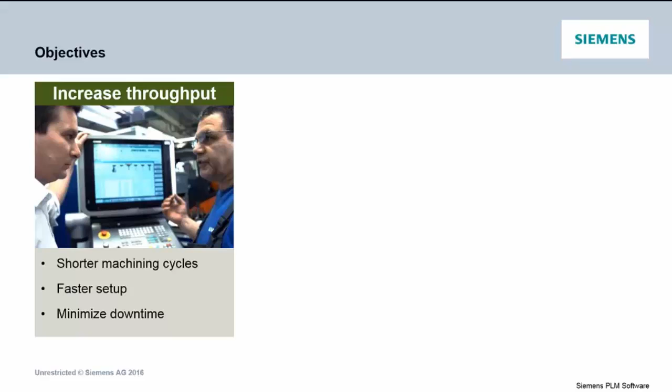Objectives, therefore, everybody, whatever industry you're in, you're going to be looking at increasing throughput. Everybody has to do this. That's one of the key competitive pressures on us. So increasing throughput can have different effects on us. Of course, from a digital point of view, in machine shops, we want to go faster, shorter machining cycles, faster setup, and so on. In quality, we want to meet quality standards. And that can mean precise machining, better finish, using best practices, so we have repeatability. That's an element of quality. So quality has many factors or many facets to it in the way you assess it or what you think about in terms of quality.

And expanding your business. As we compete, we want to look at new areas, new technologies, things that are coming into the business that we can take advantage of. And we'll look at a few of those. I mean, 3D printing, what does that fit? We're working hard in that area, and we'll show you just a little bit at the end of the presentation around 3D printing and talk about the impact there for us in our part manufacturing business. A very interesting area indeed.

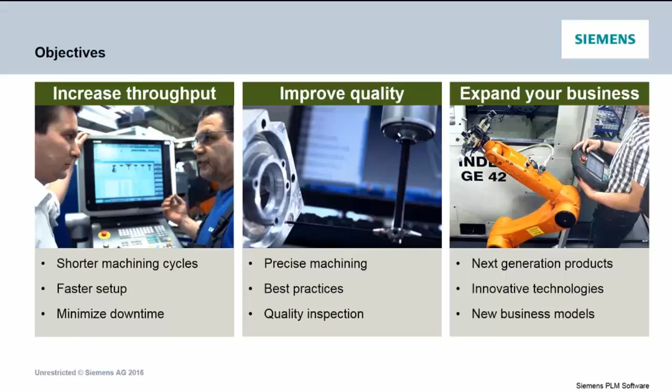So today's topic is the digital machine shop, and one of the things we're really focusing on as we talk about this topic in general is the concept of a digital thread. And how the advantages of doing that, why we want a digital thread, how we want the digital thread to work, what we mean by it, and how we operate it.

So a digital thread really, and supporting it, means being able to work with the same information right through the entire process. And we'll see this repeated through our presentation today, the concept of one definition, a consistent definition, whether we're defining a process digitally or whether we're defining the product or materials or tooling or equipment like machine tools. We want that to be consistent, and we want the information to flow consistently right through the process from manufacturing engineering. Let's say we're bringing the design data in.

You might be bringing design data in from a customer, if we're a machine shop under contract, or for a vertically integrated company that does design and manufacturing, we'll be bringing that design data in from the design office. But either way, we want that thread then to continue right through the manufacturing engineering process as we do our programming, as we do our validation, and then right through to the shop floor into production, right to the point of use on the sharp end with machine tools and fixturing devices and measuring devices and so on, and tool presetters and things like that. So consistent digital thread is what we're talking about here, and it's one of our objectives in terms of what we're trying to achieve.

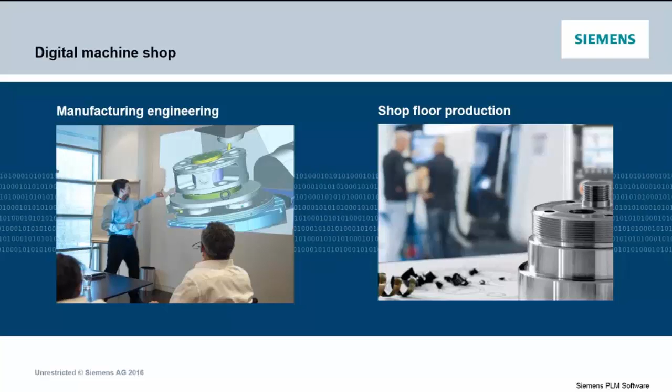So we also use this term digital twin, and that's a very important theme for us as we talk about the digital machine shop, a digital twin.

Most of you will be using a digital twin to some level, because if you're using CAM software today, most CAM software will give you the ability to create a model of the part, the component being machined, the stock. It'll also give you the ability to model some element of the machine tool in 3D solids, with all the fixturing in an assembly. You can press a button, do some simulation, but in a sense you're representing in 3D solids the physical component or physical system on the shop floor. That, at a single point, is an example of a digital twin. I have a twin of the real thing in my virtual environment.

But what we're going to talk about is not just doing that at single points like in CAM, but doing that consistently, having a system and ability to do that across all the different processes and steps through your entire process. That's the essence of what we're going to talk about today.

So we'll show you an example here, step through this as it builds. We'll show the example with a couple of different processes, and you'll gradually get the picture of why we want to extend that concept of a digital twin across your entire business.

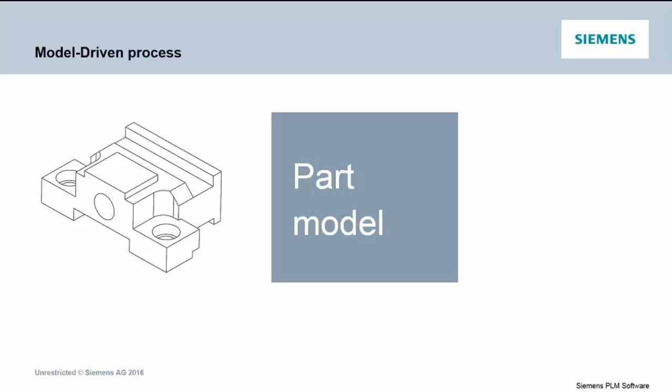Model-driven process is a key piece here because everything should be modeled, everything we're working with is often in 3D. Some of the data is just data, associated to the models like PMI data, and we have to manage that too. But the model part is critical. Everything should be 3D, should be solid as much as we possibly can. Sometimes we have to mix surface information with solid information, and we're getting smarter at doing that. But generally, we're talking about solid 3D models that come into the system.

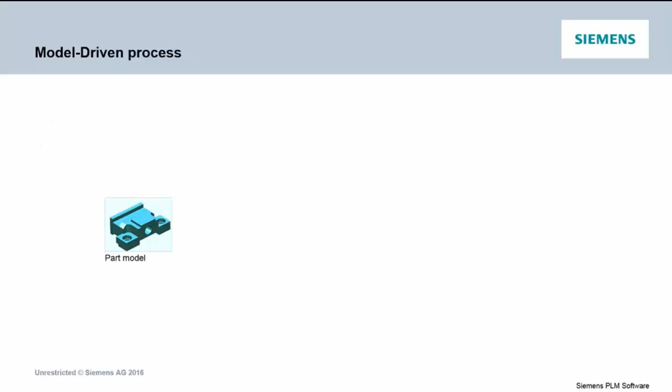We're going to show two threads here. One where we take the data in, the part model, a simple prismatic component here. We take it into part and fixture preparation. We want to work in the same 3D environment where we model everything, including the fixture and work holding, ideally using the same system, so we have one consistent environment as the part itself is modeled.

Take that into programming - in this case this thread with CAM that I talked about, where we're doing programming. We'll see that later, we'll do some simulation. Ideally we want to stay in the same environment. This is important to continuing and maintaining the consistency and resilience of our digital thread - we try to stay in the same environment with the same model definition. We'll talk more about that as we go through more slides.

Then producing shop documents, we produce it off the model. If I want a representation of the part at different stages, stage models and so on, I want to pull that off the same definition of the model with the setup data, so that it's consistent. If I have to go back and change a fixture or setup, I want to quickly replicate that in the shop documentation update. Using a consistent digital thread with the same technology, that becomes relatively easy, as opposed to using a separate system for shop documentation in Word or whatever you might do today. If I have it in the same system, I have a consistent digital thread, and that's important as I go down to the shop floor.

In the parallel thread here, I want to use the same modeling system, taking PMI data on the model. Hopefully when the data system comes in, increasingly people are using product manufacturing information attached to the model - the tolerance information, surface finish information, and so on, encapsulated in PMI data. Traditionally it would have been on drawings, and you'd have to pull it off manually. But today we can add that to the model. It's quite common, and the system today can read that in and use it to do programming.

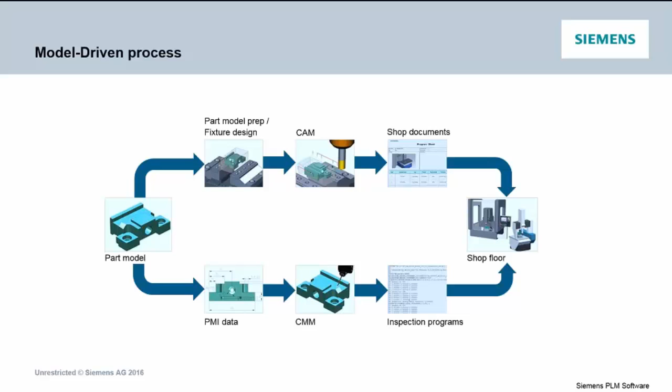What we're portraying here is using a consistent digital thread through the process, and ideally the same system across the entire environment - one system, one model, going from part preparation right through programming of different types and then down to production. This is really one of the key tenets of a successful digital environment inside a machine shop.

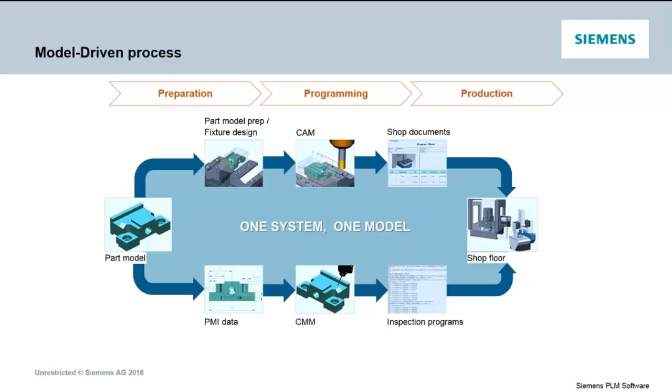We've got a video we're going to run here, so I'll try and talk to this. This takes through a number of steps here from part model preparation. We're bringing data in because I'm a machine shop - I bring data from my customer. We have to be able to read in all sorts of data files and different systems, of course.

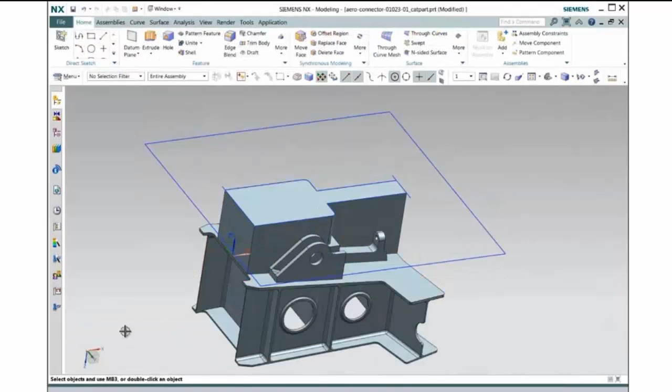Hopefully it's intelligent data, a solid model - here we're spinning it around. We're going to use our CAD functions, and it's fully integrated, so we have CAD functions available. These days some of these are quite sophisticated, giving us the ability to automatically adjust, do assemblies, for example, and maybe work on the part - fill in holes because we want to go over them for machining, changing fillet angles, or making other adjustments to the part, adding stock onto the part, using tools that are readily available inside the same modeling environment.

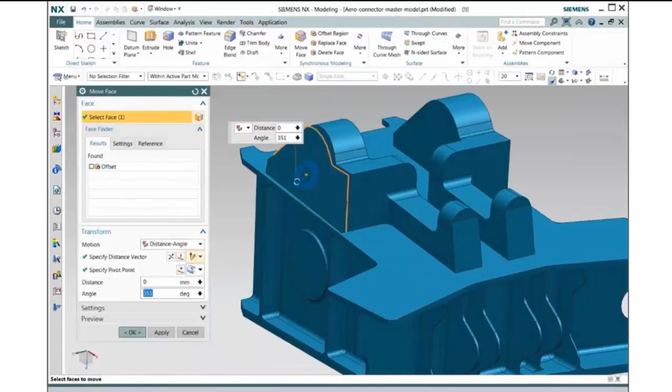So this makes it much easier rather than going from system to system. Here we see the part in a setup.

We're going to do some CMM programming that I talked about, taking the part ready for inspection. In this case, we produced the CMM inspection program from the PMI data - you see the different inspection paths here. This was produced very automatically from the PMI data that came in attached to this part. It's got an inspection program that's simulating it here inside the same system.

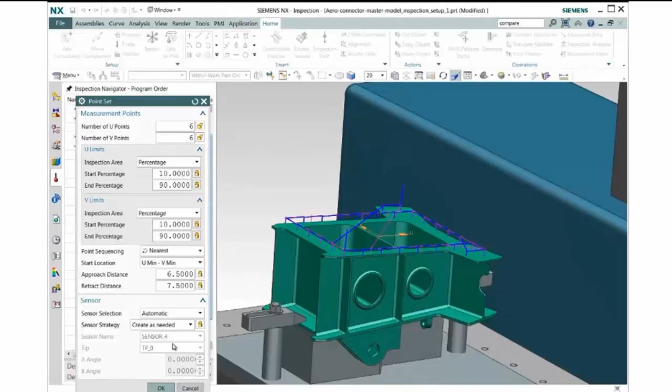We want to make a manual adjustment because we want to have fewer inspection points than the PMI data created. So we're going to go down to, I think, 6 inspection points on those sides.

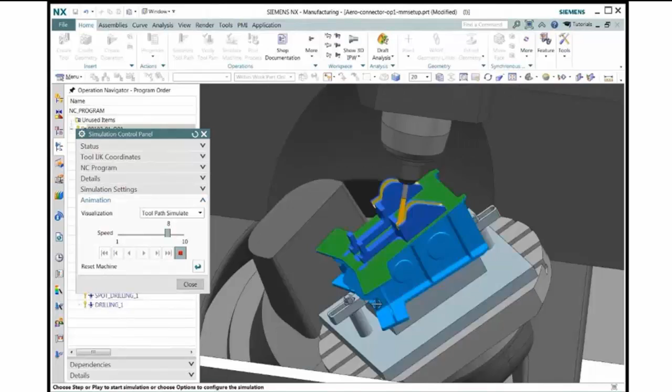Then we're going to switch across now quickly to some machining simulation, and we've done some programming in CAM. We're in the programming environment, all in the same system, same model, working in this case with a 5-axis machine. It's an assembly in the same digital environment, solid model - it's all solid, so I can check for collisions if I want to in simulation. Run by G-code - we'll see that again in a minute.

I'll talk more about G-code-driven simulation. A variety of machining processes here. We're just seeing this being simulated, checking the process, doing validation, all in the same environment before I send the data to the shop floor.

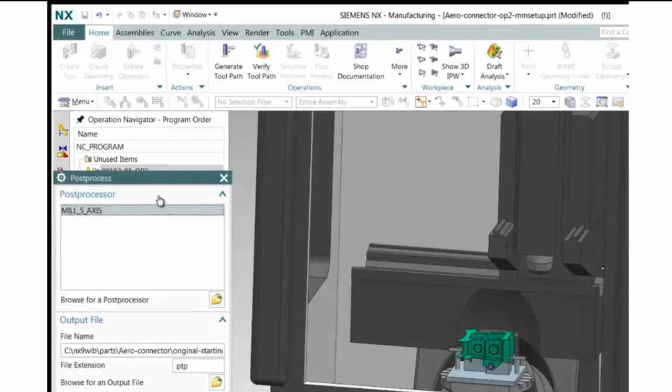Post-processing, simple 5-axis processor here, and then putting the data down to the shop floor, as I said, capturing its information from the same digital environment.

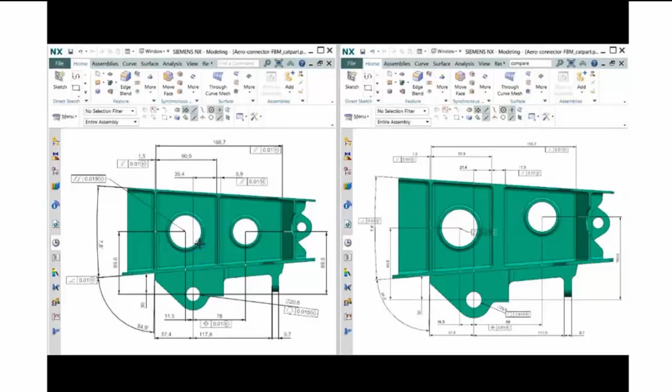Then if I do a design change, there's always updates, possibly. In this case, it's through simple changes here to this rib in the middle that's going to change, and the other is the position of this hole on the right-hand side. Change those - typical thing that happens, again, because I'm in the one consistent environment.

I have to go back and just update my machining operations, and that's virtually a click. I haven't changed the machining processes, just changed the positions, so I can reprocess those quickly and accept the updates.

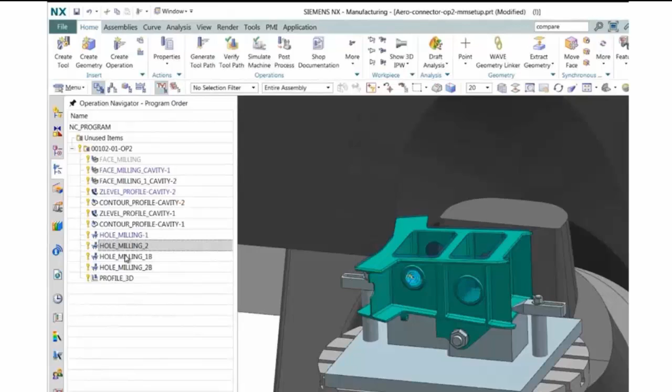Again, much easier because it's all in one system. We'll see the change next when we go back to the PMI data. I want to quickly do an update on the inspection paths to make sure they're okay given these changes. You can see we ran that very fast, working in a similar environment, everything in solids, even the inspection model and inspection probe, all in 3D solids in one single consistent environment.

So an example here, this company is not a big company, but a successful user of our systems. NX is the system that provides all this technology from Siemens, making rock crushing equipment. They use 5-axis machines and a few of those run NX, so there are valid savings in throughput and performance using this advanced technology.

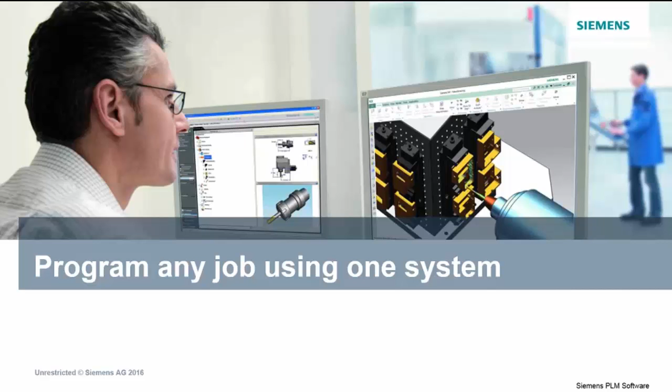If you're going to have one system, it needs to have all the functions you need, because otherwise you have to go elsewhere to buy the pieces. What we'd like to do is program any job using one system. When it comes to CAM, you need the system to give you the range of functionality you need. Otherwise people switch between systems because wire EDM is better over here, or they have different applications for turning, for example. But that makes it much harder to have a consistent digital thread through your machine shop if you have different applications.

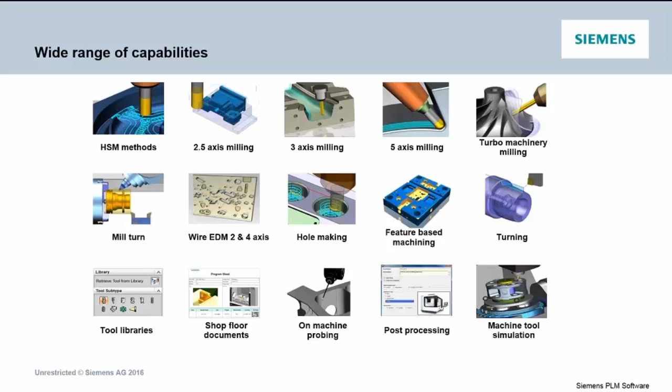So ideally you need a system that has as complete a range of capability as possible. Sometimes it means taking a choice: to get the value of a consistent digital thread, I may use an application inside my main system rather than a standalone one that offers some extra or different function. That's always a trade-off, but our view is that where possible you should be consistent and use one digital thread. That's what most of our customers find when they use a system like NX, which covers a wide range of functions, in this case in CAM.

Within those applications you need good capability, so you're not always turning to separate point applications for extra functionality. Things like volume-based milling, which we'll show video of in a minute, use more intelligence around the model. Because we're working in 3D, let's use intelligence when programming, especially for prismatic parts, which are actually quite hard to program if you have to pick a lot of boundaries. You want an intelligent system that understands the volumes, since it's 3D solid modeling, it should do that for you rather than picking lots of 2D boundaries or planes for containment. We'll show a little video of that in a minute.

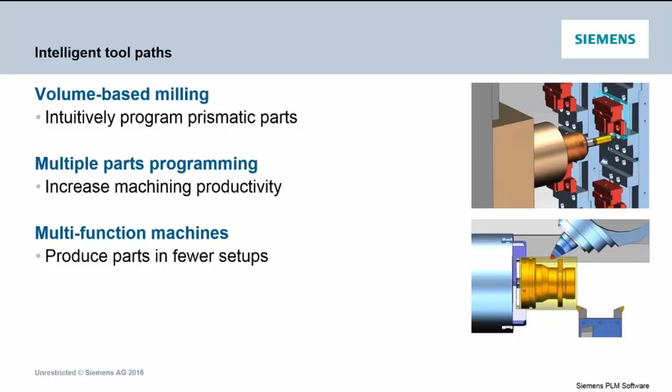Programming multiple parts: you've got lots of parts to program, especially in machinery, or the same is true in mold and die, lots of parts to program and machine, maybe across multiple setups and multiple components. We'll show some automation of that in a few minutes. Multifunction machines are another area. If I'm making prismatic or machinery parts that need turning, often it's turning and milling combined, so I want to program mill-turn combination machines, and we'll show you a video.

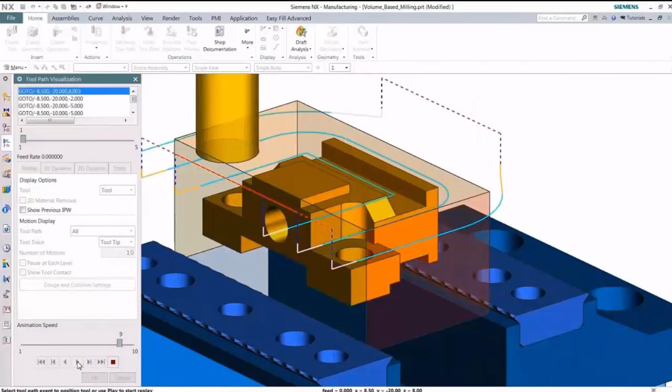So this is the video running, programming volume-based milling. This is a really interesting example where we understand the volume in 3D, so we don't have to pick lots of individual boundaries, a big contrast with some of the older systems. We can determine these volumes automatically, and the system can automatically sequence them, and if you make changes the sequence updates. There's a great deal of intelligence in the way the system works in 3D volumes. We can program across multiple setups, and the system intelligently handles the in-process workpiece from stage to stage, step to step.

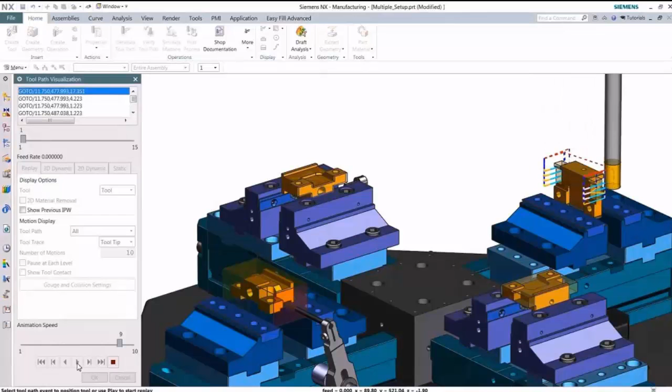And again, if you make changes, it'll ripple through. But we carry the information about the in-process model from each of these setups, and we optimize the movement from machine to setup to setup or position to position, minimizing air time or air cuts.

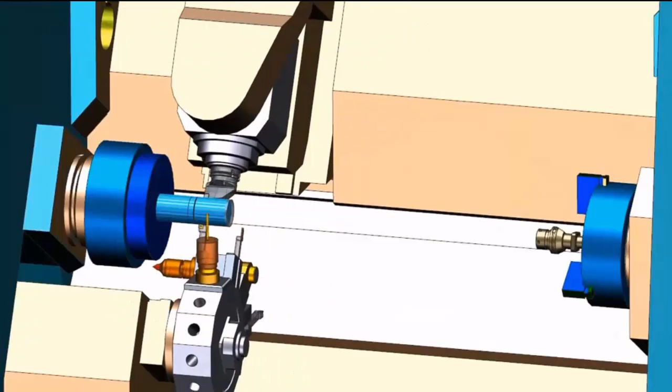Here we're switching to a different machine. This is the mill-turn combination machine, a B-axis head, a turret at the bottom, and then the ability to do part changing left to right. I think in a second we'll bring in the lower turret here and do some synchronized machining on that component on the left, and then we'll cut it and take it off.

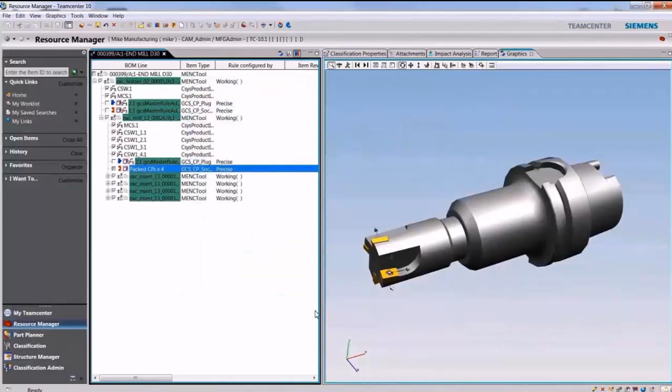Switching quickly here, another aspect, managing data. If you're in machining especially, lots of different tools, you may want a tool library. We have the ability to, working in full solids, create a solid model assembly of the tool assembly, working from our tooling database here that actually comes from our closely connected Teamcenter technology, which we'll refer to a bit later.

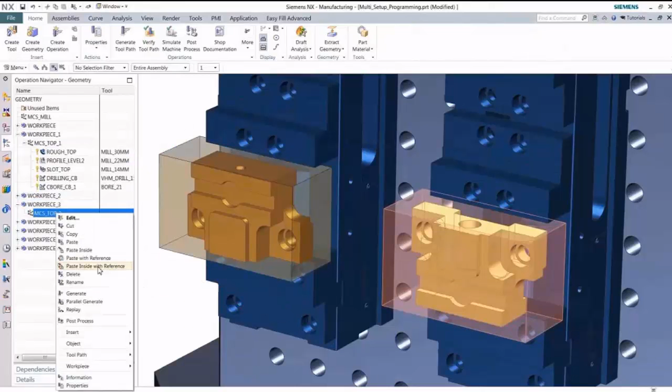If we want to move one of the parts for some reason physically, we can update the tool path relative to the XYZ positions. If you make a change on one of the parts, we can decide whether to replicate that through all the other parts or just have the change on one part.

So lots of intelligence here, which is available to us because we're working in one modeling environment, and the system is intelligent across all these different positions. Everything here, the machine, the tools, the fixture, and the tombstone are all done in 3D solids in one full assembly system that you have access to in this environment.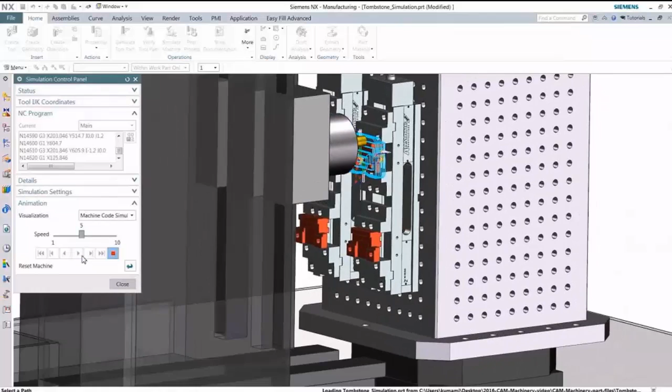Simulating G-code here, you can see the G-code running to the left on that little panel, working off machine code simulation, which we'll talk a little bit more about in just the next couple of slides. Just finishing off here a little bit more machining.

Moving now in the same video, talking about using the same system, again back to the CAD functions, the power of the assembly that you need in this environment, the assembly tools producing fixtures. These fixtures will come perhaps from a library. Obviously they're pre-designed, you may be using standard parts, you reuse them and bring them into an assembly environment to produce the work-holding arrangement for this component.

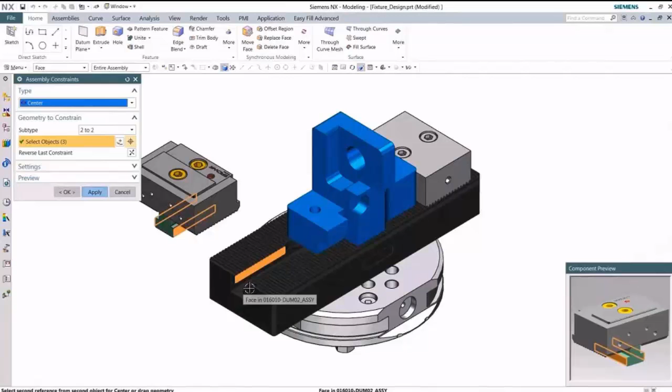Using all the same modeling environment, full solids, one system, consistent digital thread, the ability to produce that out then for drawings, setup sheets and so on from that model environment, ready to go down to the shop floor as a setup drawing.

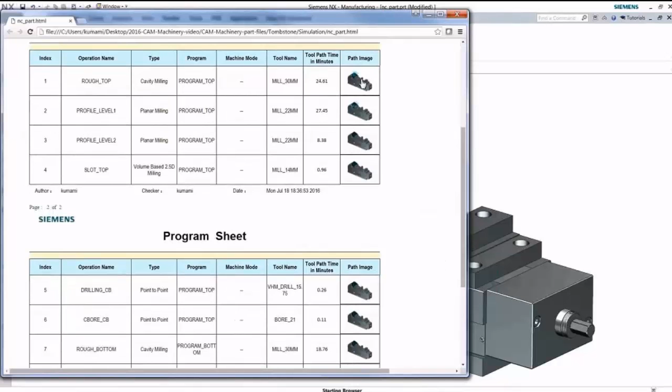Different outputs here, different formats, easy to change the formats, easy to review it, see it on a web browser, see it on the shop floor. We'll show you how we control this data and manage this data later in the last section of the presentation. And a nice little video here of the part being actually machined on the shop floor.

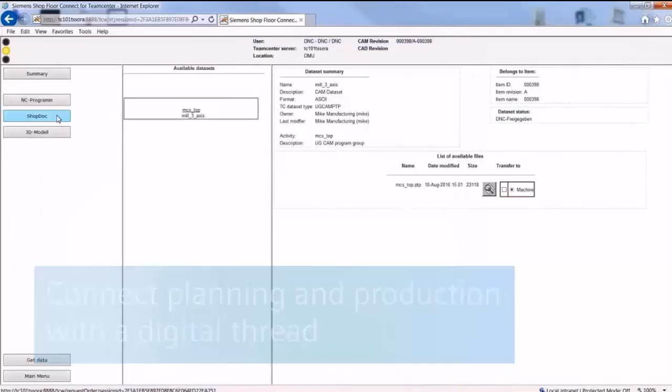Here we're just taking the data. Again, this is looking at this very far end of the process, taking the data down to the shop floor, delivering the information right out, using a DNC function, transferring the information from our Teamcenter system, where we capture the data in work packages.

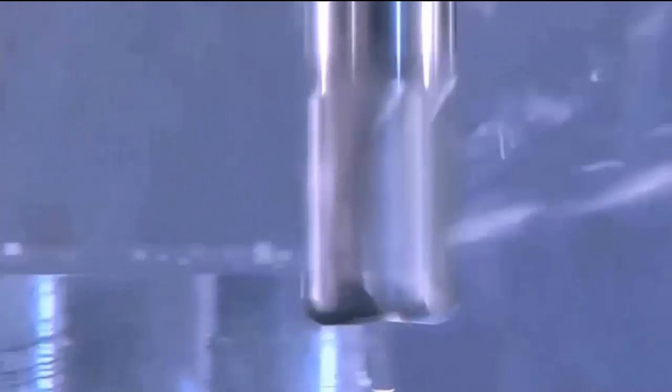Transferring it down to the machine tool using a built-in DNC system. Again, an example of where we don't want a standalone DNC system on the shop floor, a separate database, separate system, separate environment, separate logins. We want that to be one system, so we have a consistent digital thread right down to the point of use at the sharp end on the shop floor.

Automating the process. So again, in terms of throughput, that was one of our objectives. Everyone wants to go faster and they want to achieve quality, and you can attack both of these with automation. And there are lots of ways you can do this—out of the box programming automation, feature-based machining, everybody has that these days.

Automatically recognizing features and creating machining operations to address those features. With a system like NX, you have things like feature teachers and process teachers. You can teach the system to recognize your own features or special features, and you can teach it to assign special machining processes that you particularly like or perfected. So when you take another part and scan it and recognize those particular features, it'll attach that particular machining sequence.

As I said earlier, maybe if you caught it, you can look at PMI data. So the part had PMI data, let's say tolerances, positional tolerance or dimensional tolerance, for example surface finish. You could use that to select the right process or process step within a process, because in order to achieve this tolerance, you may need to use a different tooling or a different operation type.

So this kind of automation, feature-based machining, can be out of the box and fairly simple, or it can be highly customized and quite sophisticated. And if it applies to your applications, let's say you've got an engine casing with lots of holes on it, to pick those manually is terribly tedious. It takes a long time, but with feature-based machining you can cut that down dramatically.

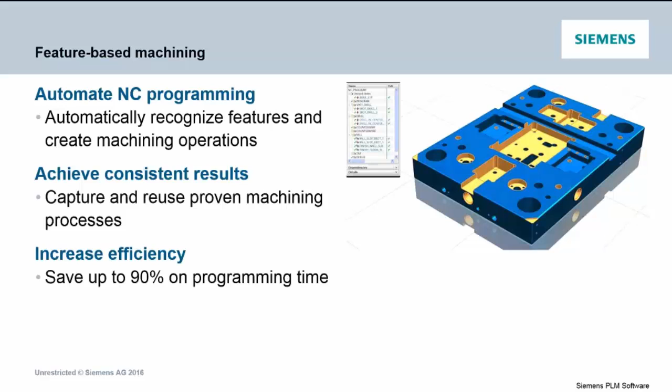Many people are using this already, but it's an important point of automation. It gives you the ability not only to go faster, but to get consistent results, because you reapply the same proven processes time and time again. You haven't got the variability in choice of tools or method that can come in when you're doing these things manually.

Machining data library, again, another way of storing information in addition to the main tool library we talked about earlier. Lots of other information, maybe cutting parameters that can be closely connected to the machining environment, where you can store your own cutting parameters, update them, optimize them, capture your know-how in different ways within this kind of database. Again, a way to automate the system, standardize operations and cutting feeds and speeds and those basic parameters associated with different tools and so on.

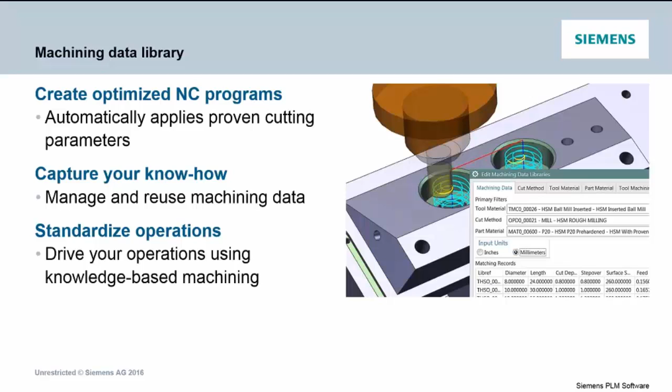Process templates, this is a really interesting area. It's not a new area, but it's extremely powerful. And in many areas we can apply these templates. You can use them, you can build them to capture different methods. We offer some out of the box, and you can capture entire processes.

It doesn't do feature recognition, but it just says, okay, you've got this predefined process in a template, and you can apply it to a new part of the same type or a similar job, and it comes up with a fully defined process for you with lots of parameters set in.

It saves a lot of issues, a lot of heartache around trying to work from scratch every time, and it makes the system more consistent. You reapply the same method, and of course it's much, much faster.

And it's less difficult. You don't need so much skill, because maybe you've had a skill built into a process by a more experienced programmer, and you can reapply these templates, or a less experienced programmer can do good work by reapplying these templates to different jobs.

So again, you need this kind of depth in the system. You're not just looking for a system that can do everything superficially. You do need to have the depth in the system to give you the capability you want, so you're prepared to use these tools in your digital system.

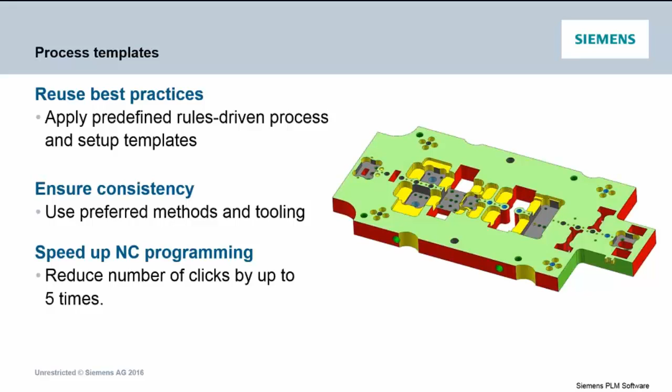Validating processes using a digital twin. So one of the big advantages of having a digital twin is the concept of doing validation. And this is where one of the big savings comes, is if I validate properly when I'm doing the definition, I'll save mistakes on the shop floor in the real world.

I don't want to find out that I've got some problems with my tooling or my inspection, I've got collisions. I don't want to find that out on the shop floor for obvious reasons, and also for delay and problems and so on. I want to find out, if I do this properly, in the digital world, where it's a lot cheaper and faster to make changes.

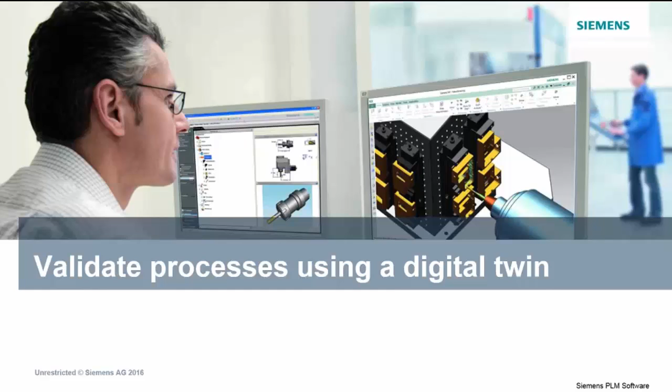So one of those is simulation. We're talking about CAM here now, G-code simulation from the post-processor. A lot of people use standalone add-on packages with some degree of success, that do the simulation after the fact. We actually like to do it inside the system here, inside the same environment that I do the CAM programming, inside NX. We can do the post-processing inside from NX, run the post-processor, get the G and M codes out, and then run that through our simulation system on the fly in the programming environment.

So you can see very fast whether your programming is looking good, what the effect on the machine is going to be. You can see the effect of all things like tool changes and non-cutting moves accurately, and check you've got no collision, that it is happening as you expect it to happen in the right sequence.

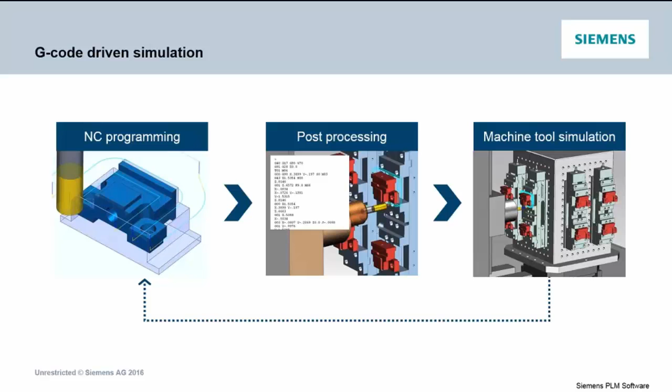Really seeing what the G code is going to do, not just what the core CAM instructions will do. So this I think is an important point, and it's a very good example of really good validation work using the digital twin, because you have a complete solid model of the entire environment inside NX.

Accurately, I'll mention these points again, just a summary here. Accurately validate machining processes, simulate in the context of the machine, and it's fully integrated inside NX.

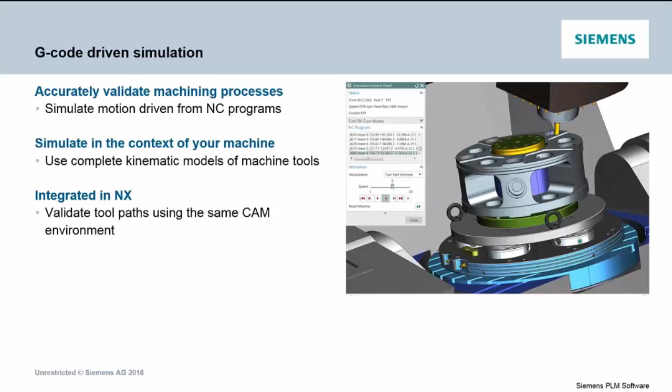G-code simulation, seamless manufacturing processes, another topic here. We've touched on some of these already. I'm just recapping really. Integrated CAD tools.

We've seen that already, working with any CAD data coming in from my customers in different formats. But when I get that data in, I want to be able to make adjustments to it. I'm able to change draft angles, fillet radii, and so on.

With some of the tools in NX, modern systems will give you the ability to do real fast editing, even though the model came in and could look like a dumb solid. You might think you can't do much with it, but with systems like NX today, you can grab components, features like that rib up the top there, move it and drag it, and the system will understand what that is, that it's a rib, and the attached fillets and so on are all part of that rib. You can make adjustments to it, maybe change the width, change the angle, and those things can be done even on what you take in as dumb geometry.

We call it synchronous modeling, that second bullet point there. It's part of NX, built into all our CAM packages, and it's an extremely powerful tool. In your digital system, you need to have tools that can support the digital process.

Latest capabilities, I mentioned many of these: modeling, assemblies, drafting inside NX. Of course, you want all that available to you across the board, whether I'm doing anything to do with my inspection programming. I want the same tools available to me all the time.

By doing that, I'm avoiding these transfers between different systems that I talked about earlier. I want to try and avoid that if I can, because if I transfer from system to system, I'm almost certainly going to lose some level of intelligence. I have to do some repetitive work. If I make changes, the changes don't ripple through the system in the same way as they will if I'm using one consistent modeling environment.

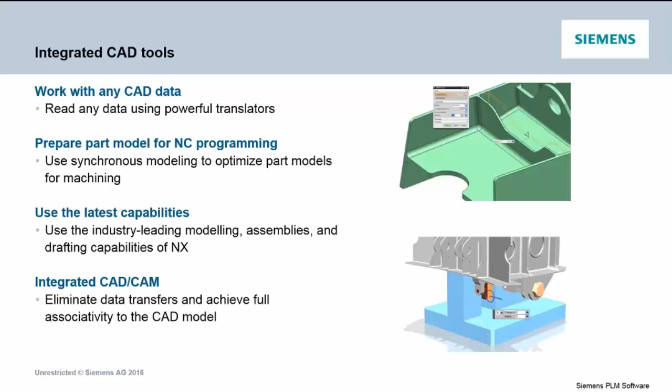Inspection programming, we've seen this already, so I'll just touch on this again. Inspection programming, really nice tool. I've been in the business a long time, and this is one of the most automated applications I've ever seen, apart maybe from feature-based machining, where we can recognize the PMI data attached to a part, if it's there, for tolerance and positional tolerance and dimensions and so on, and use it to build an inspection program on the fly.

It's one of those cases where you just press the button and the thing produces a multi-operation inspection program from the PMI data, and then with a bit of processing time, you're ready to get output to go to your inspection machine with a variety of outputs.

Coming back from that, when I run that with the software we have to drive the inspection machines, I want to pull the inspection data back and then ideally display that back in NX. So my design, if there's an issue and there's a trend problem or a change in the data that wasn't expected, we can inspect it against the design part and see what the issues might be, where the changes are, where we're going out of spec if we are. Bring that data back through NX, still inside NX, and allow the design engineer to inspect it if need be.

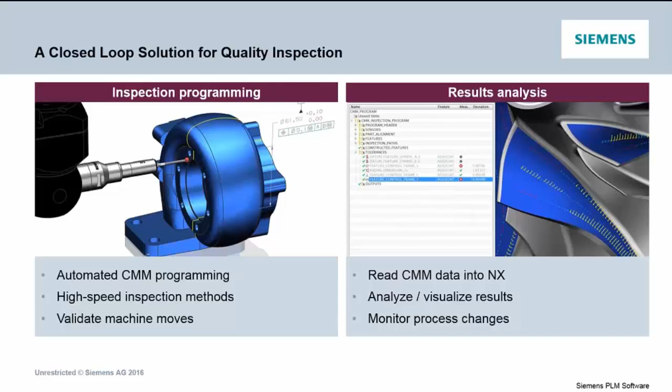Another example here, these guys making large molds, very large molds using NX. This is a combination of a process thread in mold making, could be die making, but it's mold making, where I'm working inside the same system to design all of the mold tooling, all of the components that go into the mold in full solids, and then I can go on, and if it's a small mold, I might be doing electrodes.

Again, you want to do all of that design of electrodes in the same environment, and then all the machining of the electrodes, machining of all the mold components, and the full assembly of the tooling. And maybe do simulation and validation of the motion of the tooling with all the ejectors and so on, all the various components. Again, we can do all of that inside one digital environment as one continuous digital thread.

So changing gears here, I want to talk about some new technologies, because one of the third areas I said you need to think about, in addition to going faster and meeting quality standards, is to be innovative. What technologies are out there coming at us that we need to be aware of, and can I fit it into my digital thread or the systems that support a digital environment in my machine shop? So we'll look at a couple of areas here.

One is very interesting, robotic machining. This is a growing interest, and we'll show a few examples here on the next slide of people using robots as an alternative to machine tools or as an addition to machine tools. Lots of secondary operations like deburring, polishing, finishing, trimming. CAM software as a base is very good at producing paths that follow very precise positions with high degree of control over the axis and position of the tooling. In this case, it will be the end effector attached to the robot.

Robots traditionally have been very much used in automotive for assembly work and welding and so on. And we have a very good system in our Tecnomatix suite from Siemens, one of the market leaders in robotics. But what we've done here is combine all the kinematics from their robotics applications and expertise into our CAM environment, so we can program robots to do these path-following operations. And then use all the same technology we use in our NX system across the board to do simulation, validation, looking for collision checking and so on.

But now we're using a robot in multiple axes as opposed to a machine tool. So cheaper, bigger reach. It's not going to do heavyweight roughing, but it can do lightweight finishing, drilling and so on, as well as these secondary operations that I mentioned on the left-hand side here. And then up to complete work cells. And of course, people are already using robots to load and unload. And so again, inside NX, I can program those robots to load and unload the machine, as well as doing these other operation types. So a growing area of interest for us across the world.

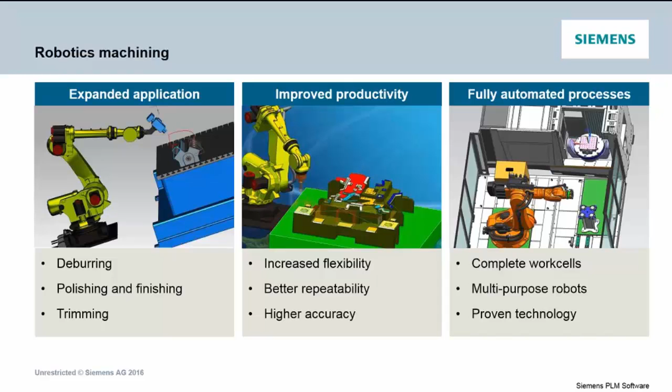People are looking to use robots more and more, especially driven maybe by the fact that some of these secondary operations like polishing, finishing, deburring, they're hazardous in terms of the personnel and materials, the environment, and regulations are driving people to stop using humans and make these things more automated. So robots are going to come into more and more of these applications, that's for sure. And again, we can do all this inside the same environment, the same platform, full solids. And again, it gives you the ability to extend your digital thread into other areas with equipment like robotics.

Changing gear again, this is 3D printing. We'll just touch on this briefly. We can do a whole session on 3D printing. That's a whole area of technology that everyone's interested in. Additive manufacturing, we're adding material in different ways, different materials, metals and plastics, and we'll just show you a few examples of that. And a lot more work here being done, again, in the same digital environment.

Top left, where both of these on the top here are what we refer to as planar, fixed plane. We're working with depositing material in a fixed plane. Powder bed is very well established. Most people will be aware of that and have seen these powder bed machines. They're limited in size because of the size of the powder chamber. You can get typically 300 mil, 12 inches by 12 inches, or 15 inches by 15 inches by 15. So they're limited on the size of the components you can make, and you have to produce these support structures to hold the component up as it's being built layer by layer.

On the right-hand side, new technology from HP that we're working with in terms of this multi-jet fusion technology to produce many parts, really looking for a much higher volume coming out of this technology. But these are planar examples, working by depositing material plane by plane. We slice the component.

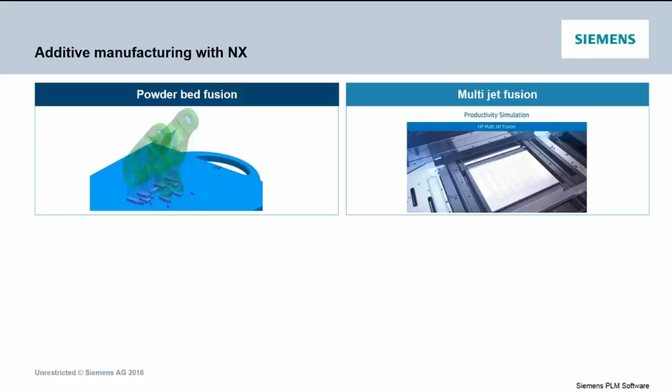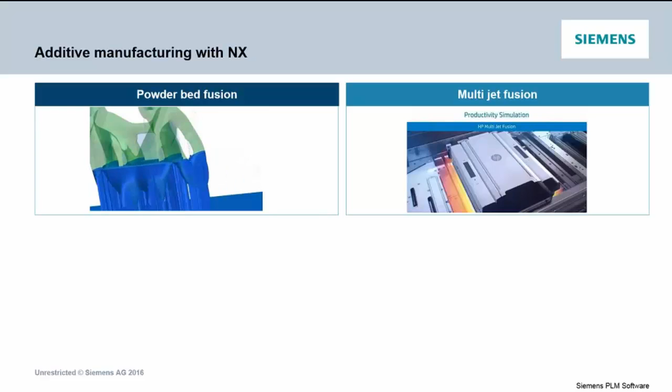But again, we're working inside NX, same environment, so we can maintain that continuous digital thread from part design, where the design of the part could be quite different because it's going to be built using additive technology, right through to the production.

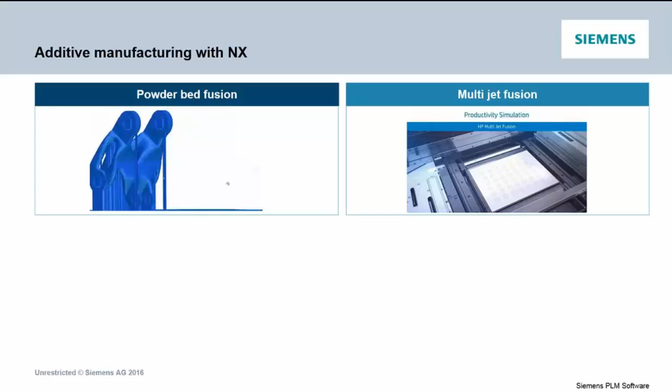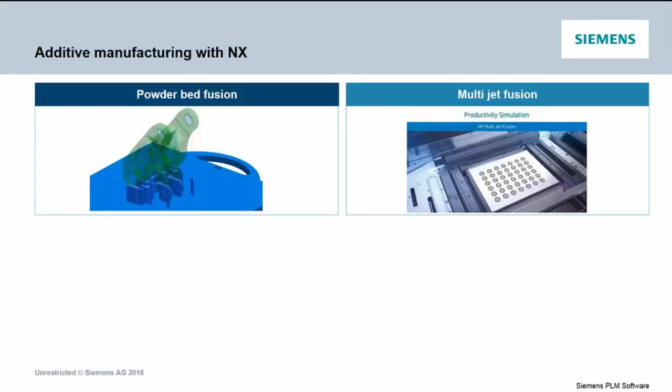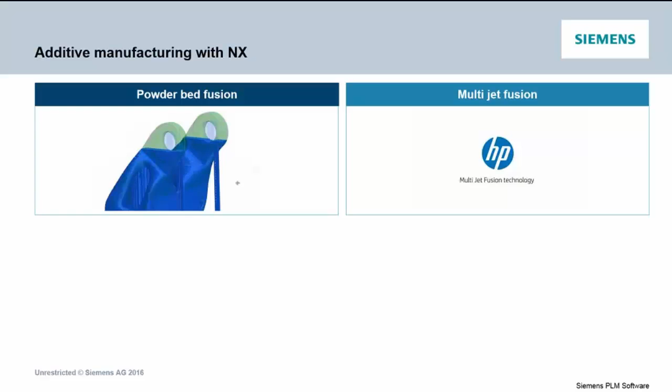And also post-printing operations, I might use robots, for example, to take the part out and then get rid of the dust, the powder, and then do post-machining operations, remove the supports by milling or cutting, and maybe polishing or finishing operations, drilling on those parts. So lots of things are going to happen here with mixed applications and operations. If I can do all that inside one digital thread, I'm going to be ahead of the game compared to using separate applications and separate equipment.

Just show a video here. This is a powder bed application, you can see the bed of powder in grey, and we're going to run through the sequence using the software here, working with a Trumpf printing machine, working inside NX, and just go through the steps of setting up the job.

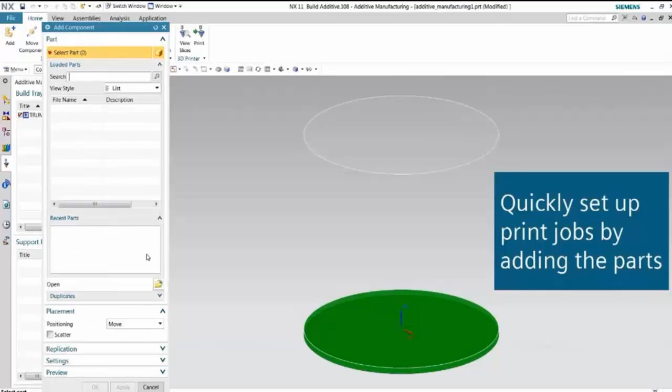Setting the part, positioning the part here. You might have many parts actually positioned on a typical build tray, and that's one of the key steps that is different about 3D printing. So we need to set this up. We have to look at the support structures that have to be designed automatically, ideally. Maybe then we make adjustments to those support structures.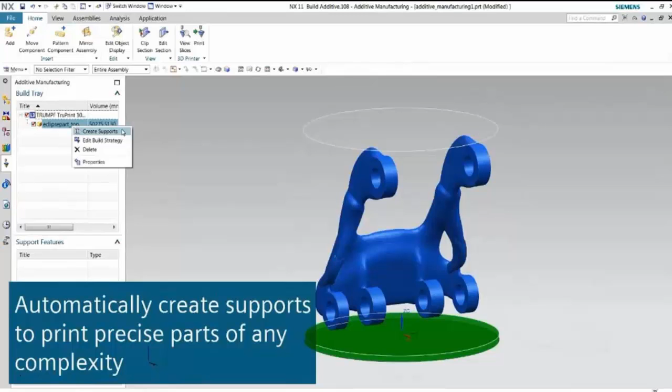Again, it's all modeled inside NX as full solids. You might want to adjust those support structures, maybe make them hollow or something, or put holes through them so you haven't got to print so much material. So this is fine tuning, but this is just a single part here.

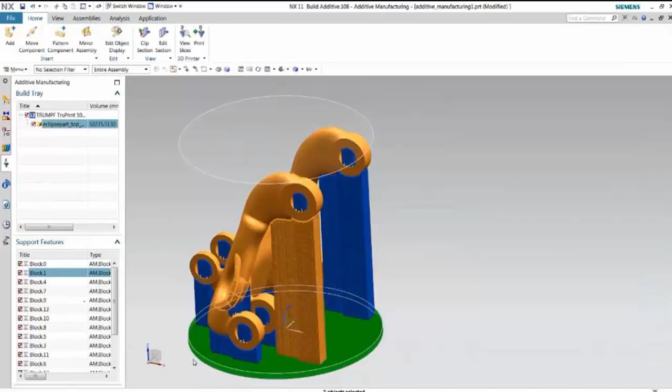So this is relatively new software, but big demand for these applications now in the market, growing across a whole range of industries to produce metal parts like this. In this case, powder bed technology.

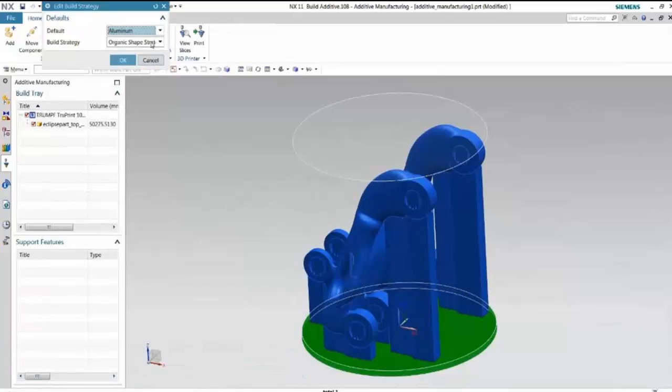Just using various tools here to check the build tray, check that the strategy is going to be acceptable, and then when we're ready, we can output the data to go to the printer and create the laser path that is going to fuse the metal powder into the metallic material. Looking at verification, so again, doing verification in the same digital environment, checking the build sequence.

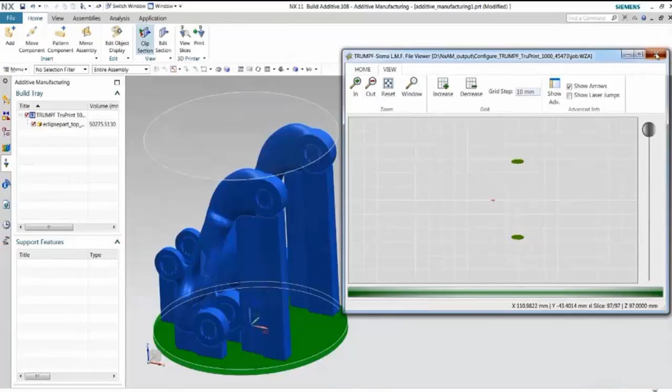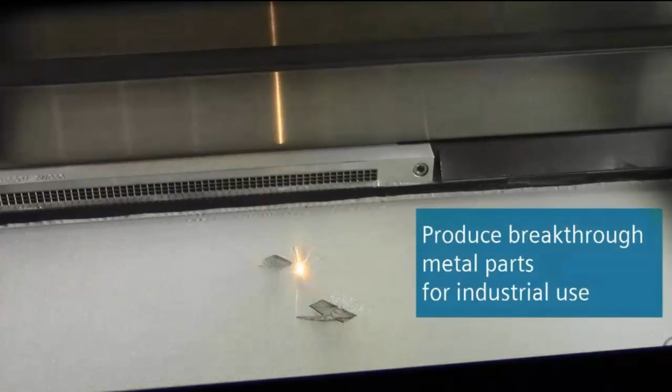And then we're down on the shop floor. I guess this guy's making sure he isn't going to get affected by the powder. He's got lots of protective gear on. And we're out of that one.

Working from either a flat base or maybe a part that might have been semi-machined to start. The word hybrid relates to the idea that we can incorporate machining techniques and intersperse them with deposition techniques. So if we have the right machine, with a laser attached to or inside a machine tool, we can do the deposition, deposit some material, let it cool, and then bring in a machining head or tool and do some machining, some finishing, before we carry on and deposit more material. So wherever we combine subtractive, that's machining technology, with additive in the same environment, we call it hybrid.

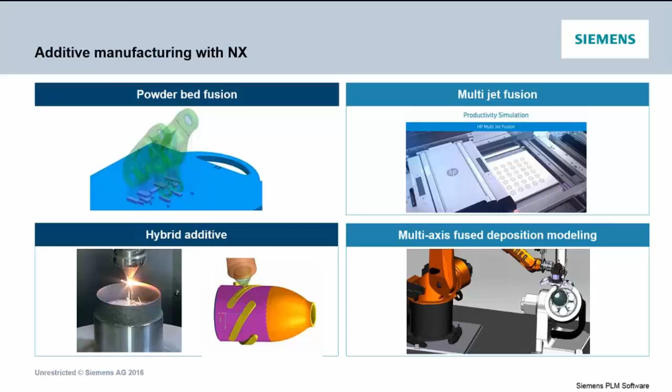So we could do deposition only here using the laser, or we can do hybrid where it's on a machine tool. We work closely with DMG in this case. DMG Mori Seiki, they have two different types of machines that are hybrid, and also the option for deposition only. On the right-hand side, this is multi-axis, again using a robot this time to control the deposition. This is reinforced thermoplastics being deposited here to make that component. It's about a foot high, 300 millimeters high.

Picking up the last topic before we finish the last chapter today, we want to make this a practical reality. There's another aspect of digital technology we have to consider: information. We're all creating information all the time, and although we want to stay in the same solid environment, we have to track it - which model am I working on, which assembly, what revision, what work package have I signed off, where is that work package, what revision is being used, who's got authorization to see it, and how do I control it down to the shop floor.

So to do that, we need a single source of information. We don't want multiple databases and separate DNC systems with their own database. As far as possible, let's try and keep this information in one environment - one consistent digital definition, not only in terms of the modeling and assemblies, but also where the data that brings all this together is stored.

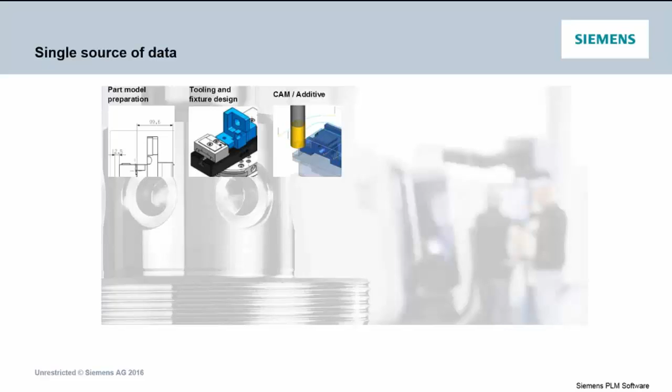So whether it's part model preparation, tooling, fixture design, CAM, additive, or CMM programming, I want to manage all this in one environment where I can manage the data and the process - the operations, the sequence of operations, and the manufacturing plan all need to be managed too.

And then access - I think we showed you a little clip earlier of the resource library. This is where this pops in. A tool library built into this same data management system where I've got models of tools, tool assemblies, tool components, fixtures and fittings, other standard components, and machines. I can really store anything here, including post-processors, under revision control.

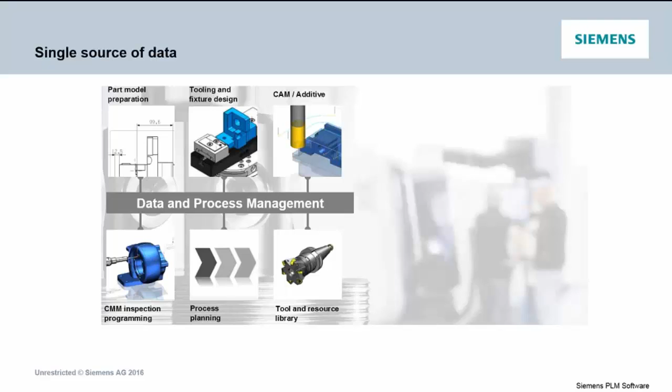So one environment that brings all this together for data and process management, and for this we use our Teamcenter technology. You could scale it and just take the tool library with CAM. If you're a small shop, you may start there, and it's important - you haven't got to install all of this in one go. You can scale it and start small, but the advantage is you know it's there. If you want to go further and add CMM or process planning, you've got the ability to do that, knowing it will plug into this same data management environment.

And of course, when you've got the work package defined, proved, and validated, you want to send it to the shop floor - down to presetters, other equipment, CMM machines, and machine tools. Maybe do validation on the shop floor; they want to run the simulation there to check it. They can do that, and link to tool cribs and so on. So again, we want this not to be a separate database - I want this to reach out to the shop floor.

It's going to have different user interfaces - I may want to use a tablet or some other lightweight device, a simple web or browser interface, but I'm going back to the same data. Depending on my authorization, I'll log into the system and it will give me the approved work package for the job, say job number 5610. Inside that will be setup sheets and work instructions if appropriate. I may need to connect that to an MES system on the shop floor, and I may want to send the information straight down to the machine tool controller without going through a separate database.

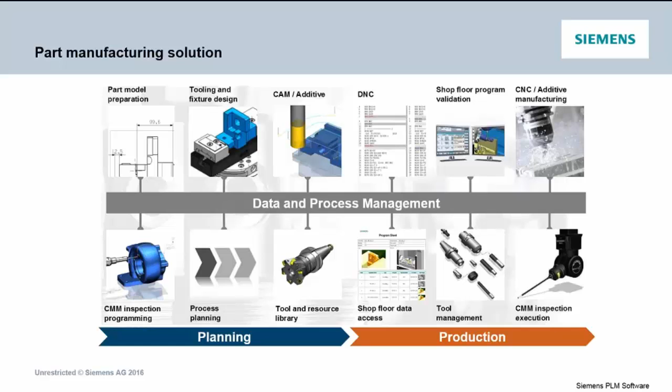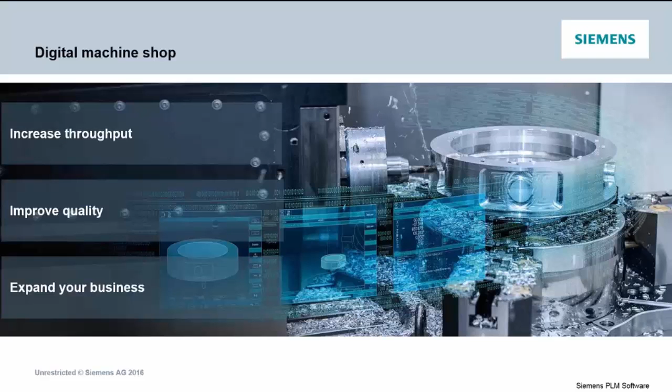And we can do those things with these connections from Teamcenter, so we go from planning to production in one consistent data environment - very much a core part of the digital thread concept. So that's it today. We've come through a number of steps: increasing throughput, improving quality, and the ability to expand your business with new areas of technology. But whenever we do all of this, we want to stay in the digital machine shop using digital twins supporting this consistent digital thread concept.